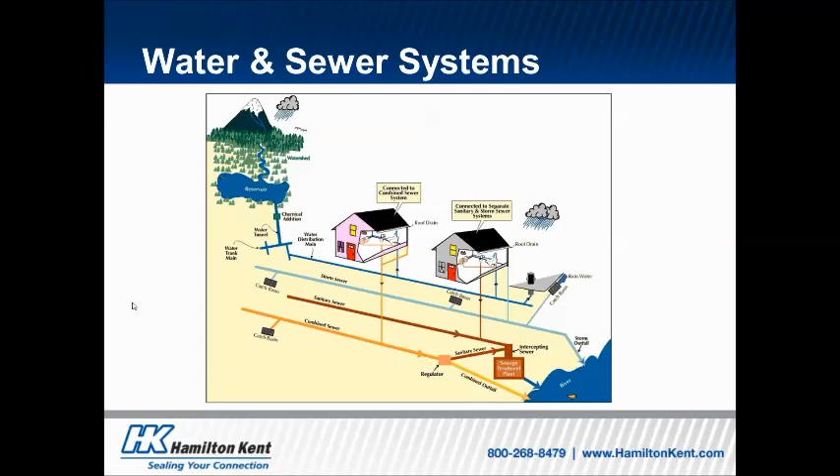This might be a little small on your screen, so I apologize for that, but it's a quick schematic that shows the different varieties of sewers and water distribution. I'm not going to talk about all of this, but I thought this is a nice way to start, to show where it all starts with the water coming in on the distribution lines. You have water mains coming into the houses, you also have rainwater that comes out of storm systems, and where all that water then goes, whether it's into a storm sewer, a sanitary sewer, or a combined sewer. This is just a schematic to show how it all wraps together.

So why gasketed joints? I think that's really the big question. The first bullet point, I think, is very important: increasing specification by government agencies. We're certainly seeing more cities, more counties, more state DOTs requiring gasketed joints because they see the value in making sure they have watertight connections. An example would be Tennessee DOT - they now require gasketed joints on all their pipes and no longer accept butyl sealant.

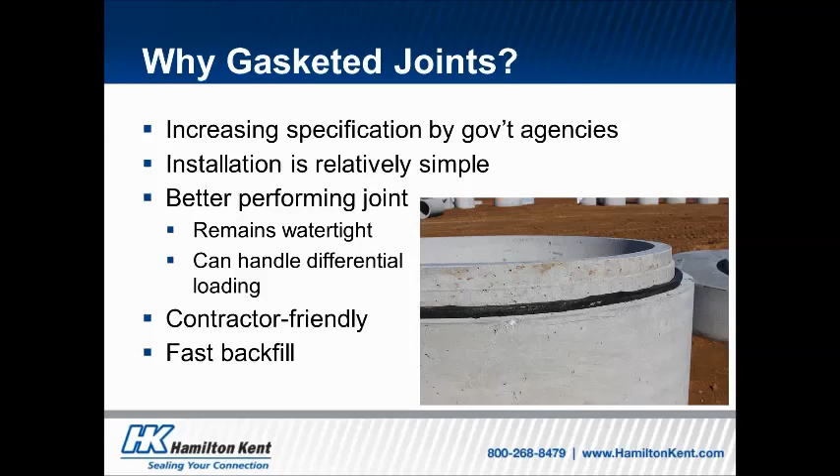So those are a couple reasons why gasketed joints are so good. Now for some joint basics. The manufacturer of the pipe, the box culvert, the manhole, or whatever structure has a joint, must supply a joint and a gasket, or a butyl sealant, that meets the specifications on the job. So if it's ASTM C443 for a stormwater project, they're required to make sure that whatever they send to the job site, whether it's the structure or the gasket, meets those requirements.

The field performance of any joint really comes down to three things. One is the joint design: is it able to handle the requirements of the standards? The quality of the joint manufactured in the plant, is it good enough to meet those standards? Then there's the rubber gaskets: are they the right size, the right type, the right material to meet those requirements? And the third factor is the care with which the gasket and the unit are installed and handled at the job site. Those are three very important considerations when it comes to joints and gaskets.

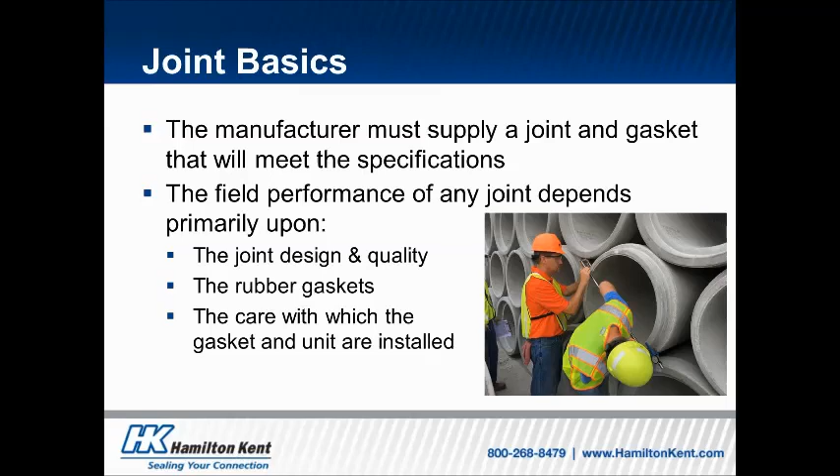There are simple steps that can save the cost of repairs, and there are quality assurance steps that plants and gasket manufacturers can take to prevent something like this from happening. But it can also come down to factors at the job site, as I mentioned before.

Contractors do like a good price, no doubt about that, because this is such a heavily price-driven market that the lowest bidder gets the job. So they're always looking for a good price, but they also want reassurance that when they install the pipe and the gasket, the joint is going to perform properly, because they know that if it doesn't, that's eventually going to cost them in another way. So contractors do have their own reasons for wanting quality on the job site.

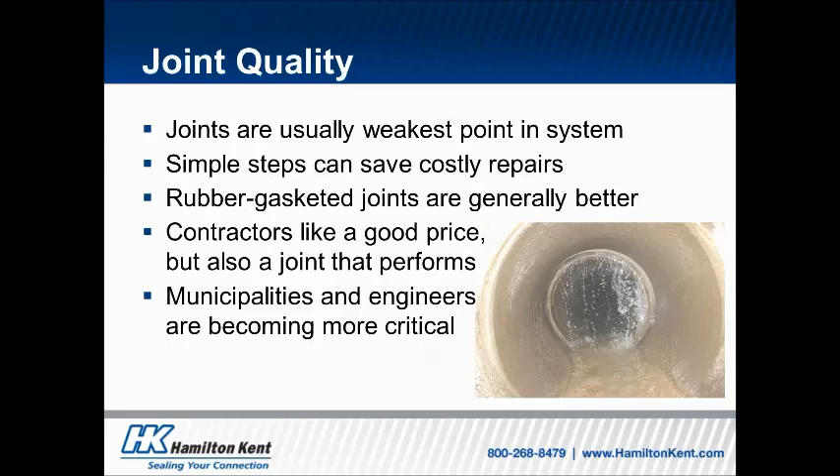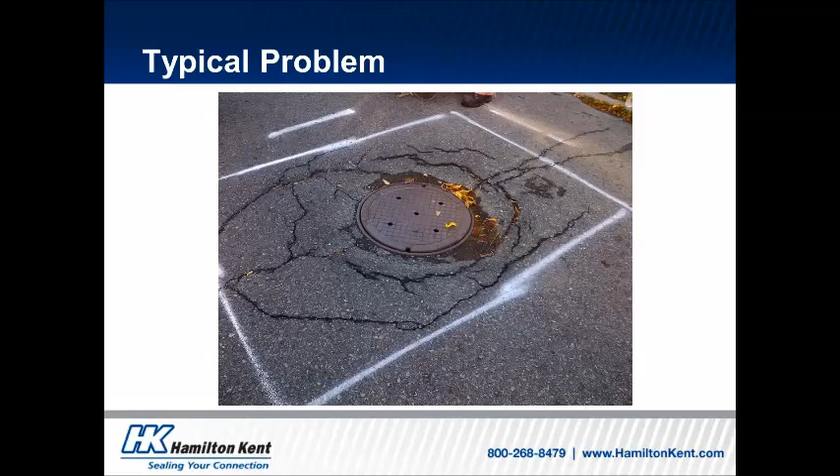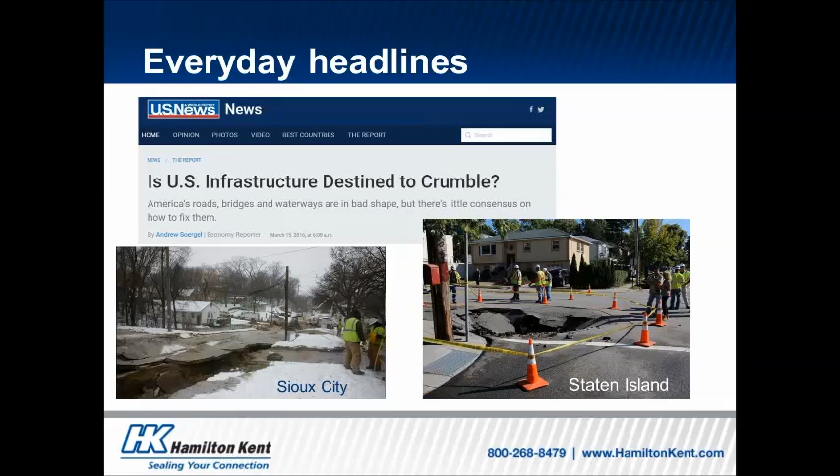Here's some everyday headlines. You've probably seen some of these yourself, and there's certainly a lot more out there. But is U.S. infrastructure destined to crumble? Certainly we're seeing examples of that, but everybody knows infrastructure is important and needs to be rehabilitated. I think steps are being taken in the right direction, but it's still happening all around us. Maybe just the fixes aren't being done at a fast enough pace.

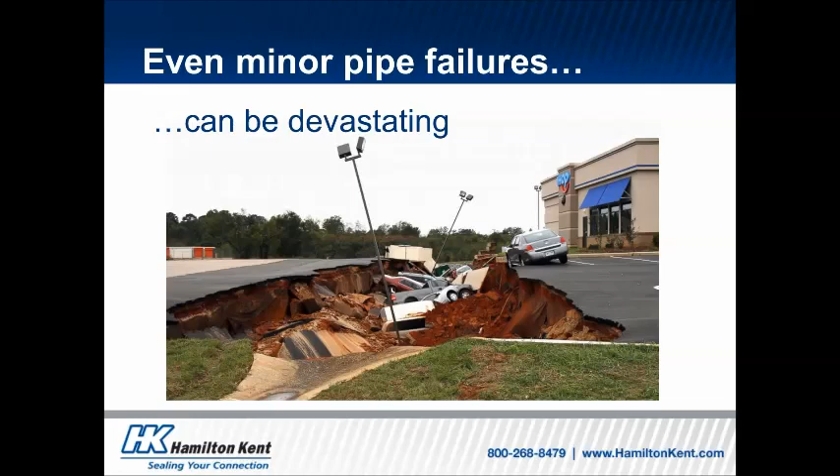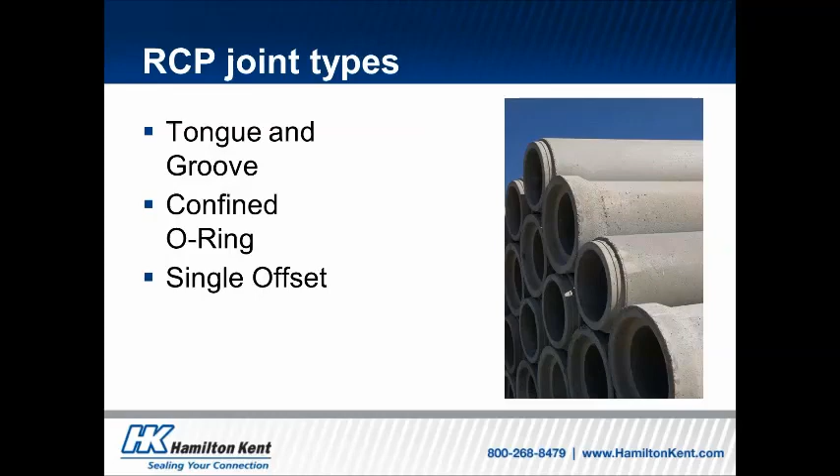So now let's talk about three different types of joints. I say RCP for reinforced concrete pipe, but this also applies to manhole structures as well as box culvert. The first one is tongue and groove, then confined O-ring, and then single offset.

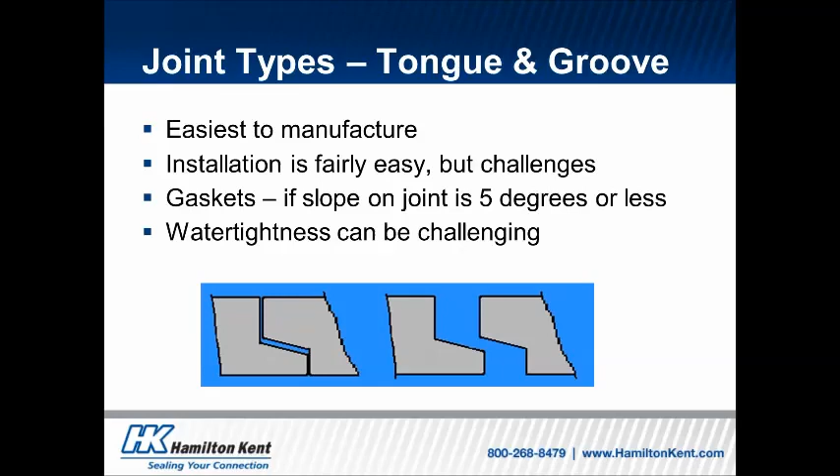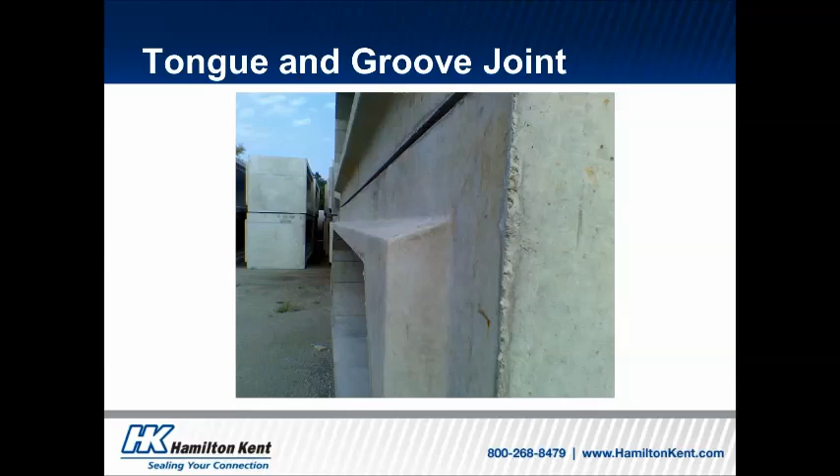Here's an example of a gasketed tongue and groove joint for a box culvert, and it's a very good example - nice straight lines, a very smooth joint. So this would be a very high quality tongue and groove joint.

I talked a minute ago about grouted pipe joints. A lot of times these are just tongue and groove joints, and then rather than using butyl, they just use a mortar and mortar all the joints. Unfortunately, most of the time that we are aware of this or see this is out west, where there's more seismic activity. So you've got two issues: number one, you can't backfill this trench until the mortar's dry. Number two, if there's any type of movement in the ground, any seismic activity, any differential loading, that grout is going to crack. It doesn't take a whole lot for grout to crack, and as soon as that crack is formed, water's going to start leaking in there, and that just creates more issues like what we've already talked about.

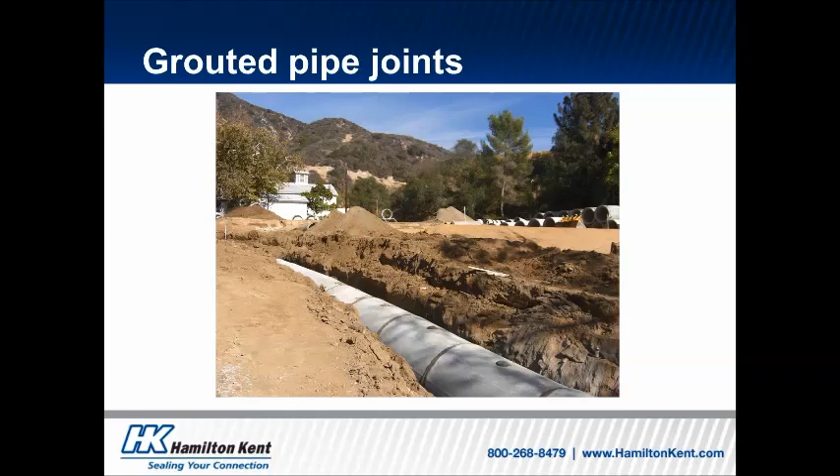The O-ring joint is next, and that's the joint that was developed many years ago just because it had excellent water tightness and very high pressure resistance. You still see that used to some extent, not as much as it was years ago. A lot of companies have switched to the single offset joint now, but you still do see some O-ring joint, especially if it's going to be any type of pressure pipe. The gasket is closely confined - you can see this groove right here where the gasket would sit, so it's confined in that space, and that's what creates the pressure between that space and then the bell coming over it.

It is more challenging to manufacture, which is one reason why a lot of manufacturers have gone away from it. In order to make it, you have to have a snap ring on your formwork, then remove the pipe or manhole from that formwork, and carefully take that snap ring off without chipping the corners of that confined groove. If you chip that, it could mean you lose the water tightness - the gasket could roll out of that joint or just won't seal as well. So it is more challenging to manufacture.

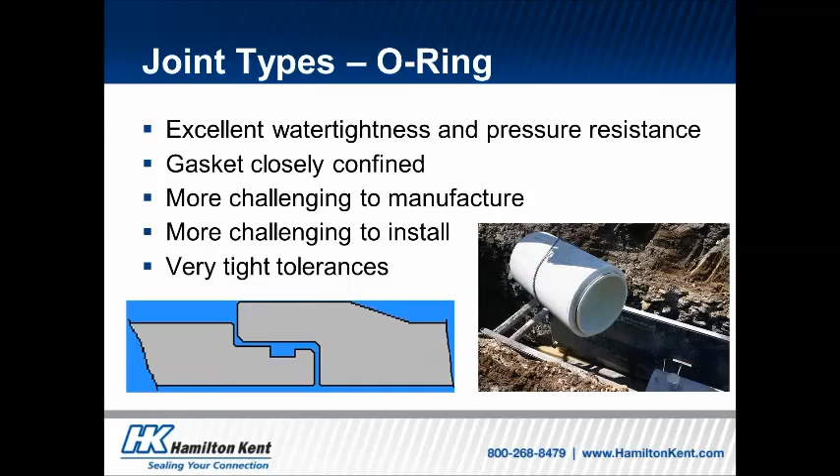Installation is also a factor. There are a few steps involved with putting a gasket on and then homing that pipe, so it is more challenging for the contractor as well. And then there are very tight tolerances - extremely tight tolerances to manufacture this, because in order for the joint and the gasket to work properly, there's not a whole lot of variation you can have in that joint to have it perform well.

And then, as I just mentioned, the single offset joints - manufacturing is easier, but that's because even though you don't have that snap ring to deal with to make that confined O-ring, there are still tight tolerances in order to perform well with a gasket. Installation is simplified, simply because there's not nearly as much labor involved with installation of the gasket, and it usually goes together a little bit better, a little bit easier when homing the pipe or homing the manholes.

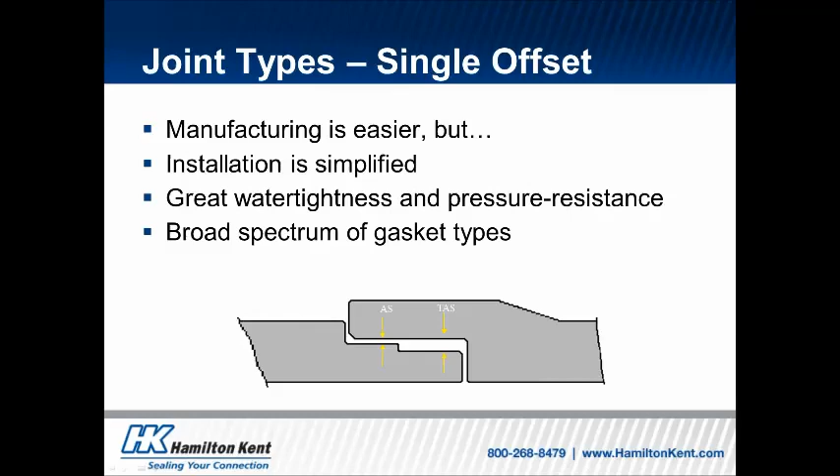Very good water tightness and pressure resistance - it may not be as high as an O-ring can go, but certainly single offset joint will meet C443 requirements of 13 psi. There are a broad spectrum of gasket types which will work with single offset joint, which is another benefit, so there's lots of opportunities and choices for producers as well as for contractors.

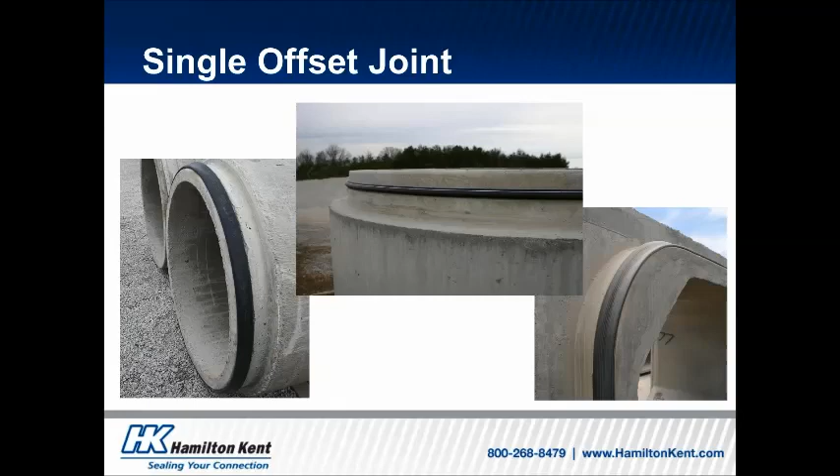So here are some single offset joints on a variety of different structures. You have round pipe on the left with a super seal pre-lubed gasket on it. In the middle you have a manhole with a wedge-shaped gasket on it. And on the right you have, again, a super seal gasket, this time on a gasketed box culvert. So all those with single offset joints.

You also can use a gasket on non-round pipe. These again have single offset joint - the first one you have arch pipe, and on the right you have elliptical pipe. It seems to work very well, especially with a pre-lubed gasket, just because it helps with kind of centering the pipe when you're homing it.

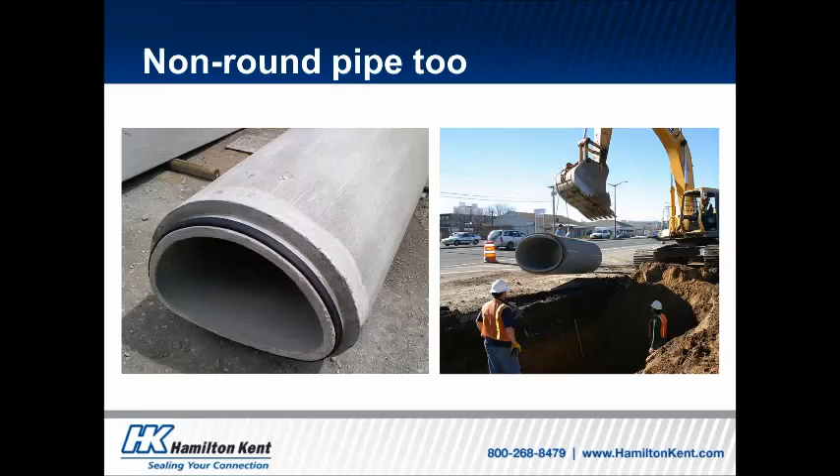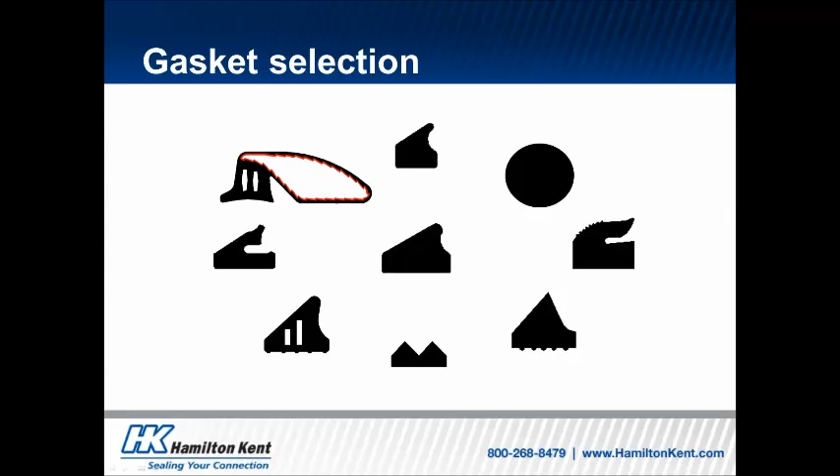You have obviously an O-ring gasket over here. You have a variety of different types of gaskets with a notch in the back - this is supposed to help with areas where there's maybe a higher water table, so more external water pressure. Those pockets help to expand the gasket when there's external pressure. I just wanted to point these out because there are a variety of different types of gaskets available. Obviously, the O-ring is not going to be one of those options for single offset, but that does show the different types of gaskets.

So how do you choose between gaskets? First of all, I think from the producer standpoint, it's what type of tooling do you have? Maybe you already have single offset tooling, and that's going to give you a lot of options. But it could be that all you have is a confined O-ring joint, and then your options are going to be limited either to continuing to go with an O-ring gasket or to going with new tooling to create a single offset joint.

So that's going to be the first step. From a contractor and engineer standpoint, a lot of times it's going to be what is offered by your local producers. If there's pipe producers in your market making single offset joint pipe or manholes, there's a lot of different options, but there are some areas that still require O-ring gaskets, so it's going to be a confined O-ring groove.

What does the market expect and is willing to try? Contractors in general are pretty set in their ways. A lot of times they know what they want - they want butyl sealant, or a pre-lubed gasket, or something else. But in some markets, contractors are willing to try something new. That's what happened with Super Seal 25 years ago when it was first introduced into certain markets. Contractors found they really liked it, and they ran with it. So it really just depends on what the market is willing and able to do.

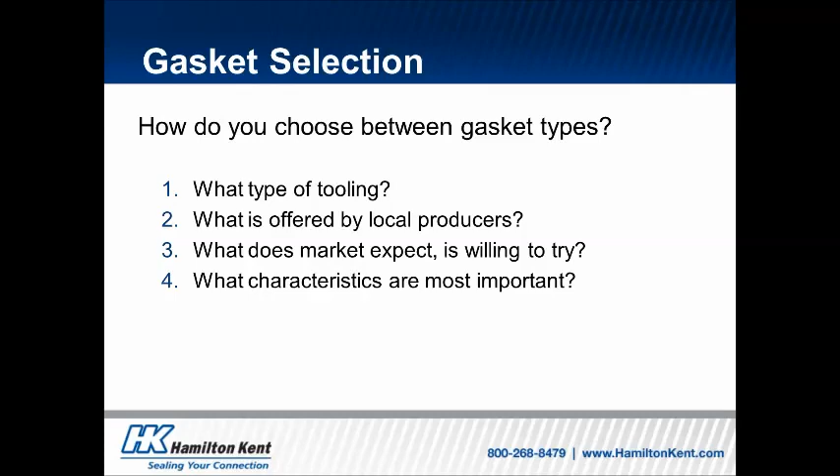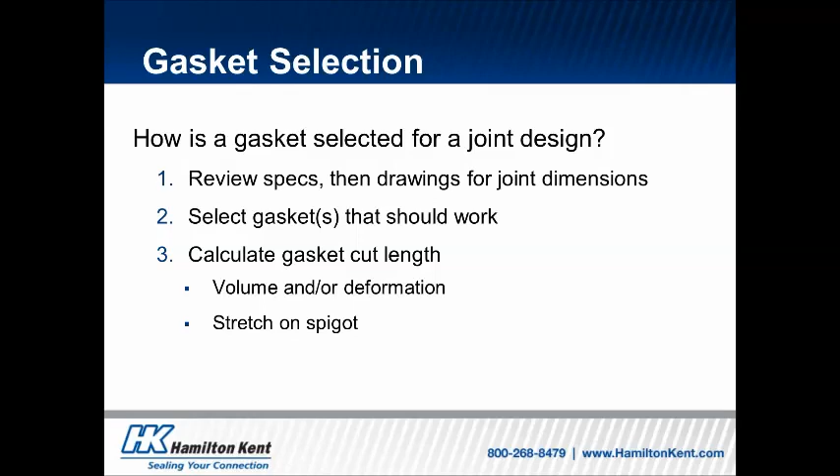So then, gasket selection - how is it selected for a joint design? From our standpoint, we go through these steps. I don't want to spend a lot of time on this, but we're looking at the joint, selecting a gasket or multiple gaskets that'll work. We come up with which profile and then what volume will work with that gasket or joint, and then calculate the stretch on it, and get that out to our customer. Fairly simple process - I make it sound maybe more simple than it really is, but it really is relatively simple from our standpoint.

Gasket material - there are a variety of different materials out there. We primarily use maybe 3 or 4 of them. First question is going to be, is there a specified material? As I mentioned before, if there could be contaminants running through a pipeline or in the ground where the pipe's going to be running, you may need something special there - whether it's alkaline or acid resistance, that would be an EPDM gasket. If you need oil resistance, we prefer nitrile gaskets, but neoprene also works. So there's a variety of different types of gaskets available. That's something to check with your salesperson or supplier to make sure they can supply what you need.

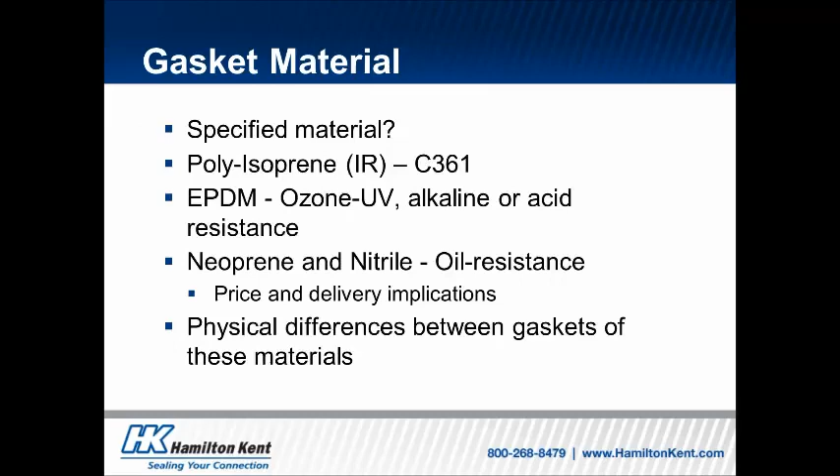ASTM standards - I think this is very important to cover quickly. ASTM C1619 was developed a few years ago, and now ASTM C361 and C443, which are two of the big ones in the pipe industry, as well as C1628, C1677, and others, now refer to 1619 for gaskets. So they'll still have the performance requirements for the pipe or the structure, but when it comes to the gasket, they'll actually refer to one of the classes shown in this table for this ASTM standard. So Class A would be C361, Class C would be C443, and so on.

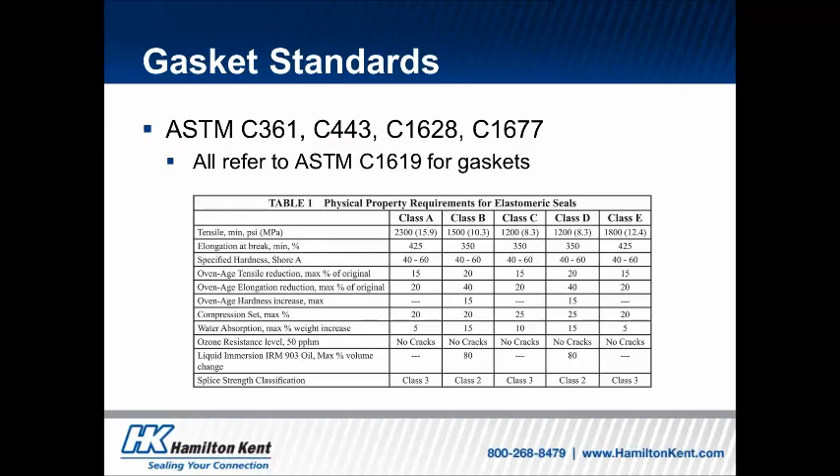I also want to talk for a moment about gasket quality assurance and why it's important. There's really kind of a slim margin between a watertight joint and a problem in the field. If the gasket's too small or the joint is not manufactured within tolerance, you could have a leak - or vice versa, if the gasket's too big and the joint is also out of tolerance, you could bust a bell. We try to find the sweet spot, making sure the gasket works with the joint, but it's certainly a partnership between the producer of the pipe and manhole, as well as the gasket supplier. Making sure the contractor receives the correct gasket is obviously very important. We do our best to make sure our customers receive the right gasket, but nobody is 100% - mistakes can be made.

So it is important for the pipe producer to make sure that the gaskets being shipped out to the job site are correct, and that instructions are being supplied to the contractor on how to install a gasket. If training is needed, they can work with the gasket supplier on training.

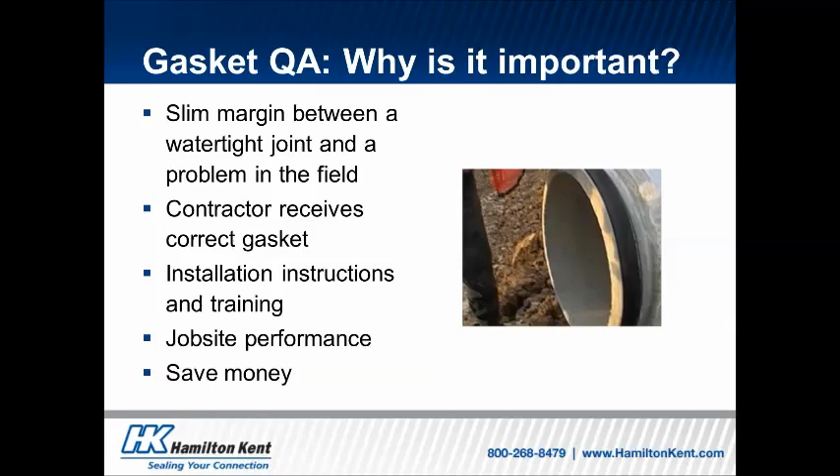And then job site performance comes down to all these factors. So if the joint performs well, then that works great, and everybody saves money because nobody has to go out and repair anything, and the contractor's happy.

I'm not going to talk too much about these, but here are some of the gasket quality assurance tests that are done. We do all this ourselves, but in some cases customers will also do this just to double check, and some certification programs require them to do this anyway. These are just to make sure the gasket meets those requirements.

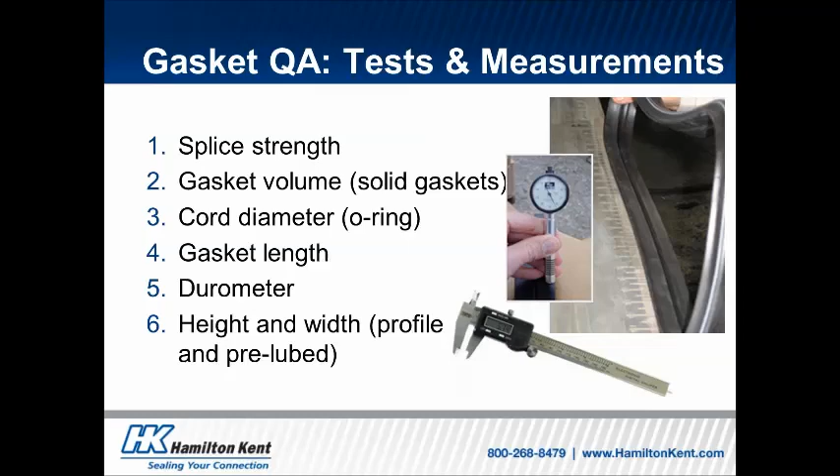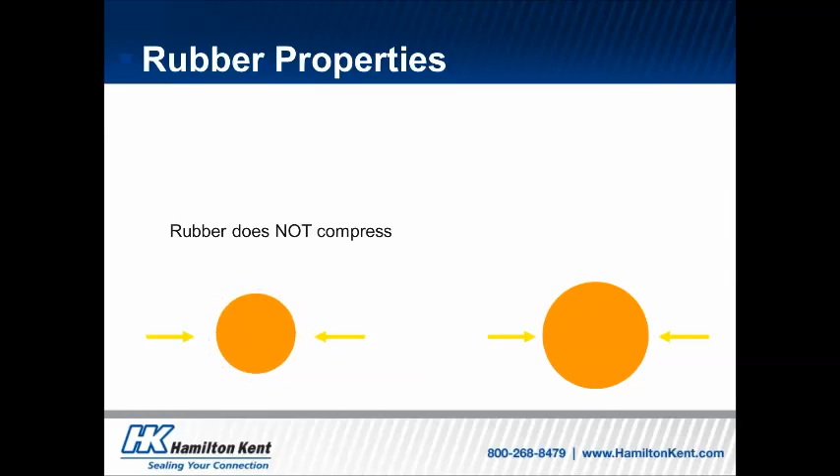So now let's talk a little bit about rubber properties. Like water, rubber does not compress. So you're not going to see what's happening on the left; you're going to see what happens on the right, where it deforms. You're not going to be able to make that circle smaller, it's only going to make it lopsided.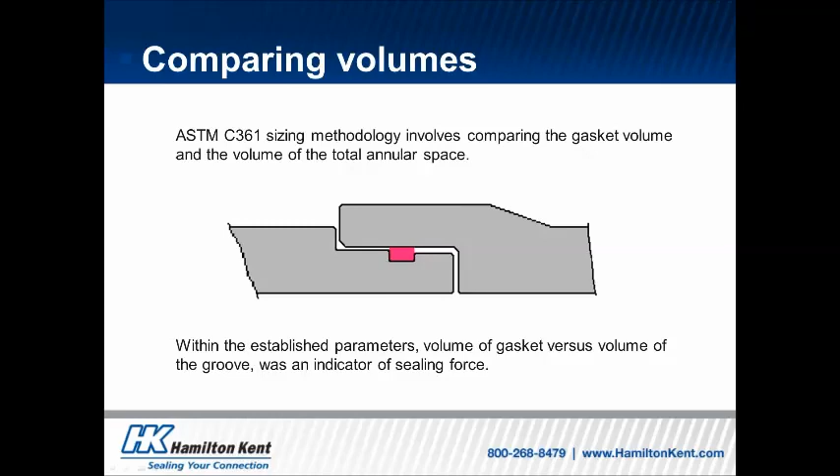So ASTM C361, the sizing methodology, when it was first developed, was comparing the gasket volume and the volume of the total annular space, designated here with this pink square, pink rectangle. So within the established parameters, you look at the total volume of the gasket, which is pretty easy with a round O-ring gasket, versus the volume of the groove, that pink area, and then they could determine what the sealing force is going to be.

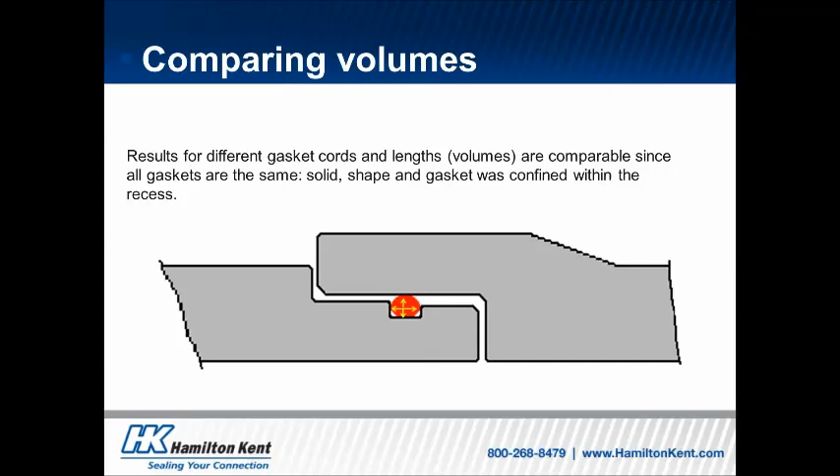So here you've got results for the dimensions of the joint and the dimensions of the O-ring, so it's pretty simple. It's a solid shape, and the gasket is confined within that recess, so it's really a fairly simple way to do it.

Well, when the single offset joint was first coming out, and we were selling our pre-lubed Super Seal gasket, we had some issues to overcome with the end users and the specifiers, because they're used to being able to calculate very easily what the pressure resistance of that joint's going to be by looking at those two things, the O-ring as well as confined space. Whereas with a single offset joint in this gasket, or even with just a regular profile wedge-shaped gasket, there was not really a way to figure that out.

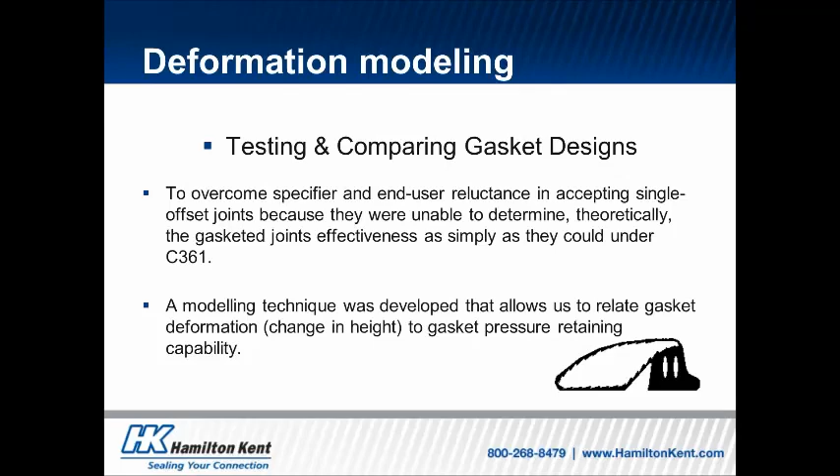So we came up with a method called deformation modeling, in order to calculate what the sealing force of a gasket was in a single offset joint. I want to talk a little bit about that over the next few slides.

Some of it's going to be a little bit on the technical side. We're going to look at some graphs. I'm going to go through it relatively quickly because I don't want to keep you guys all day. But if you have any questions about it, certainly you can ask in the question box, or later on I'll be supplying my email at the end. You can email me, I'm happy to answer those questions.

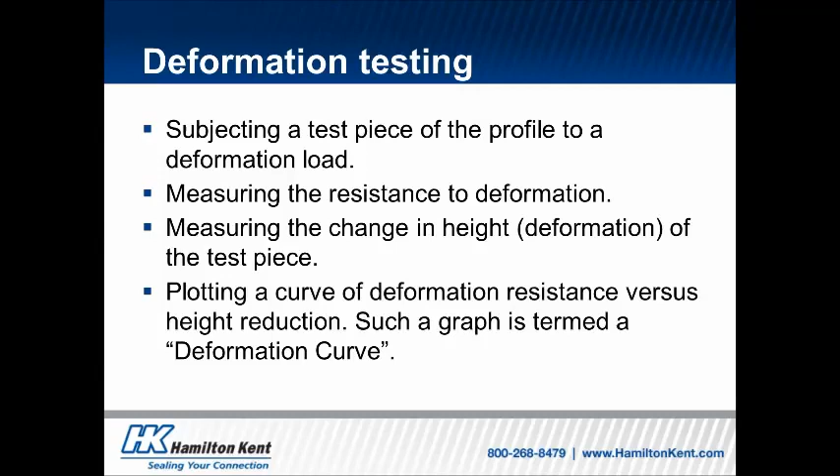So first of all, deformation testing. You're basically subjecting a test piece of gasket to a deformation load, and then measuring the resistance to that deformation. So you come up with a gasket profile, and measure the change in height of the test piece that's being deformed, and then you plot a curve. That's what we're going to be showing here in just a moment, what that curve looks like.

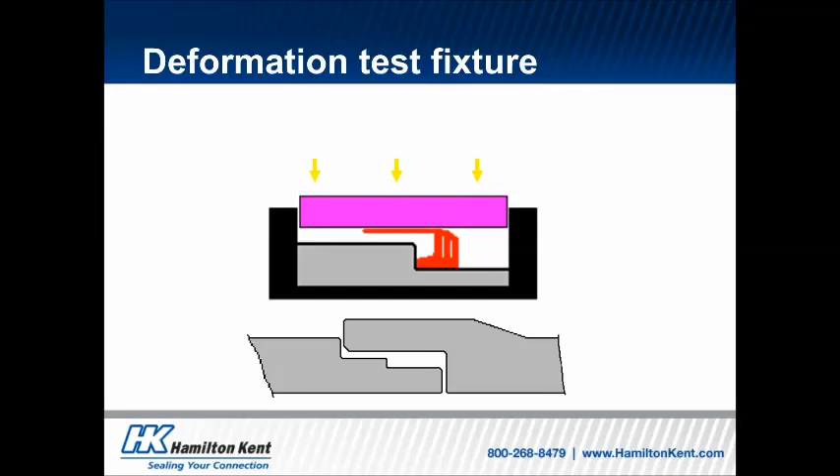But before we get to that, I'm going to show you how it's done. So you can see down the bottom of this is the picture that shows a single offset joint like we've seen already. Well, what we've come up with is a test fixture that looks kind of like what's up at the top. It has walls that are the black part, and then you have a step, which is just like a single offset joint, right here. You put the gasket in here, and then you have a load you apply to that. So that pink part is coming down, that's the load being applied to that gasket.

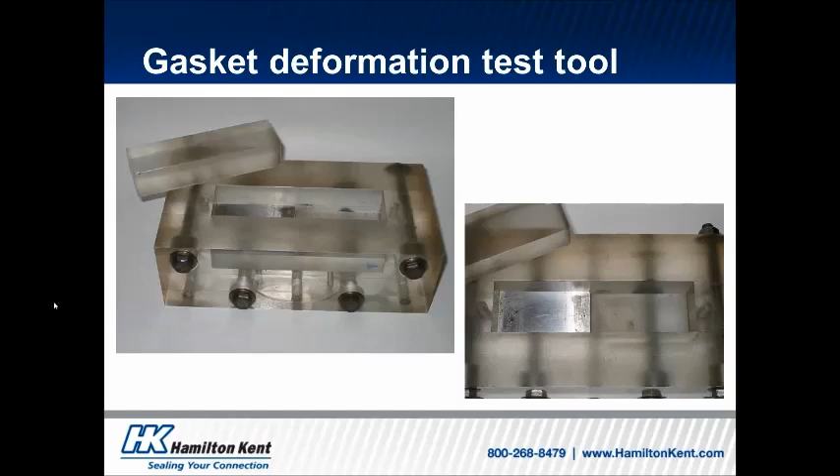Here we can apply a load with this device. You put the whole contraption in, and the gasket inside of it - you can see there's a super seal pre-lubed gasket that's inside this - and you put the block on top, and then you apply a load to it.

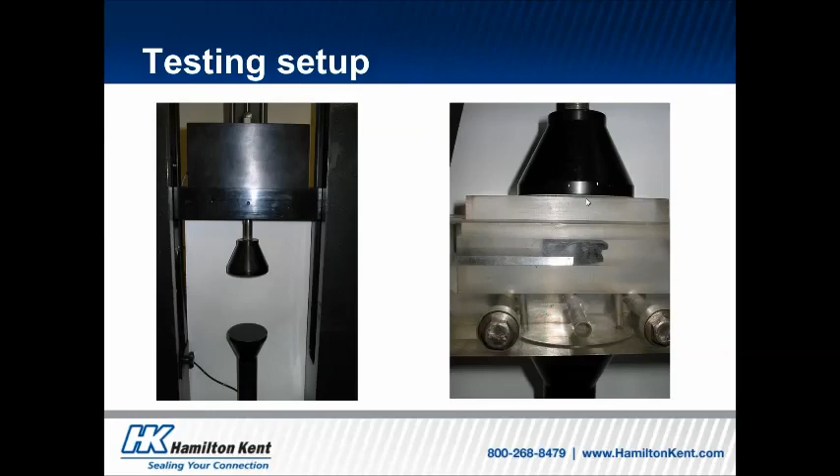Since we're measuring deformation resistance versus deformation, which is the change in height, the starting height of the gasket is very critical. There are three factors that are important in the calculations here, listed below.

The stretch height - when the gasket is actually applied on a joint, it's going to be stretched, maybe 10%, 15%, 20%. So there's going to be some stretch to that gasket, which shortens the height a little bit. The effective height is the height of the gasket when the bell comes over it. And then you have stress relaxation, which we'll talk about in a moment - that's another factor.

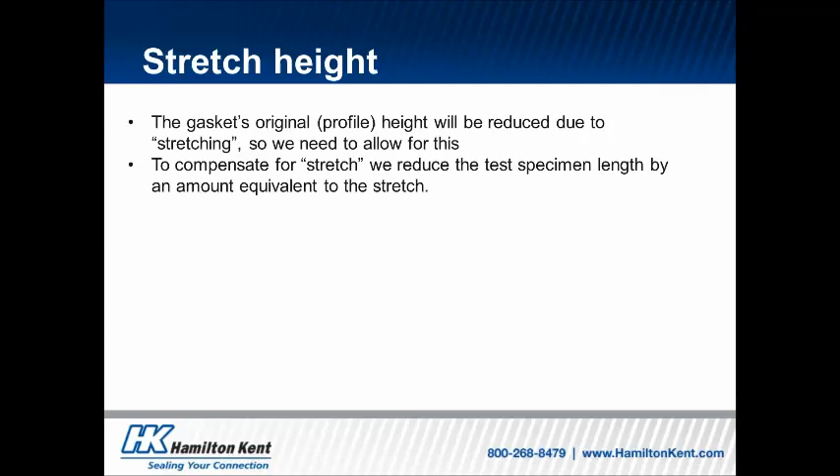Stretch height: the gasket's original profile height will be reduced because of stretching. To compensate for the stretch when doing the calculations, the test tool length from where the step is - the width for the step - is 1.453 inches. If we have a gasket stretch of 20%, that's the designated stretch for a particular joint, the specimen length is then reduced by 20%, so it's calculated times 80%. You end up with 1.16 inches.

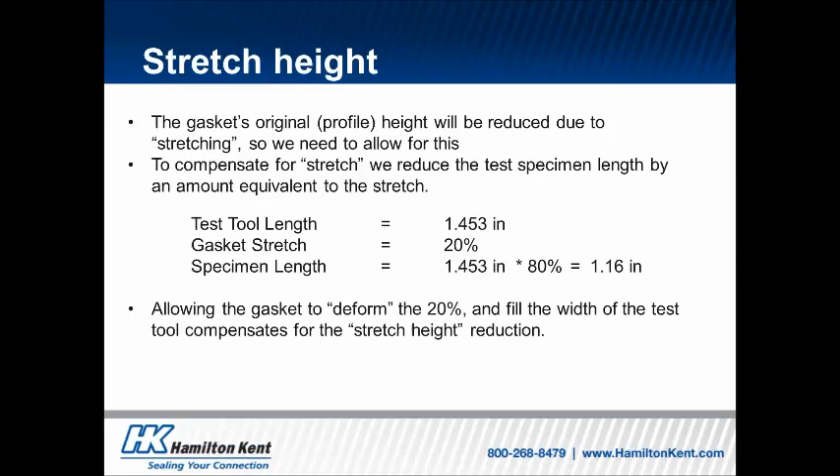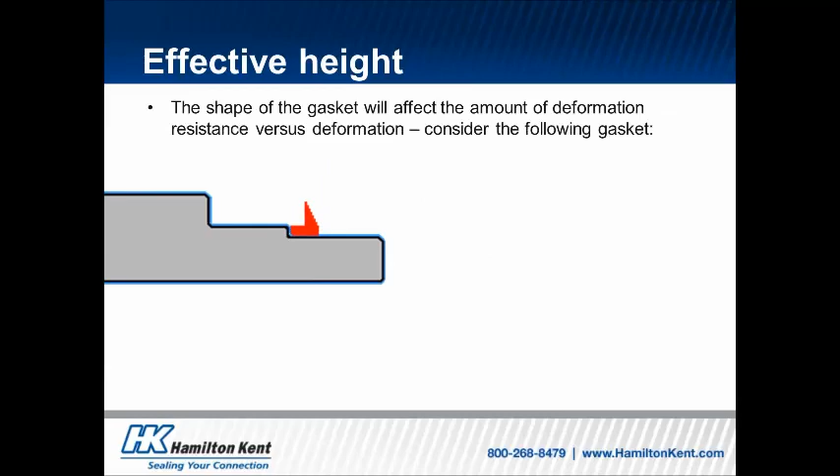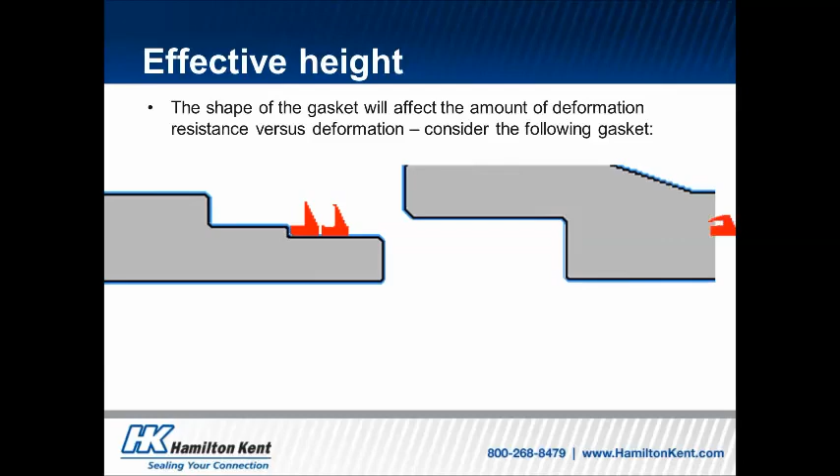That allows for the gasket to deform to the 20%, so it'll start filling the width of that test tool to compensate for that stretch height. Then you have the effective height - the gasket goes onto the joint, which is just the height of the gasket without anything done to it. Then you have the profile with a little bit of stretch to it, and then the bell coming over, which is the effective height. So there's the profile height, the stretch height, and then the effective height.

So now I mentioned stress relaxation. So that's what this is. A rubber will relax if a load is applied to it for a constant amount of time, with deformation, and there's going to be some relaxation to basically the power of the gasket.

This is defined by DIN 4060. The gasket is deformed by 40%, and then the power is measured, just like what we were showing in that graph. Then it's maintained at 40% for 15 minutes, the power is remeasured, and the relaxation factor can be calculated from that.

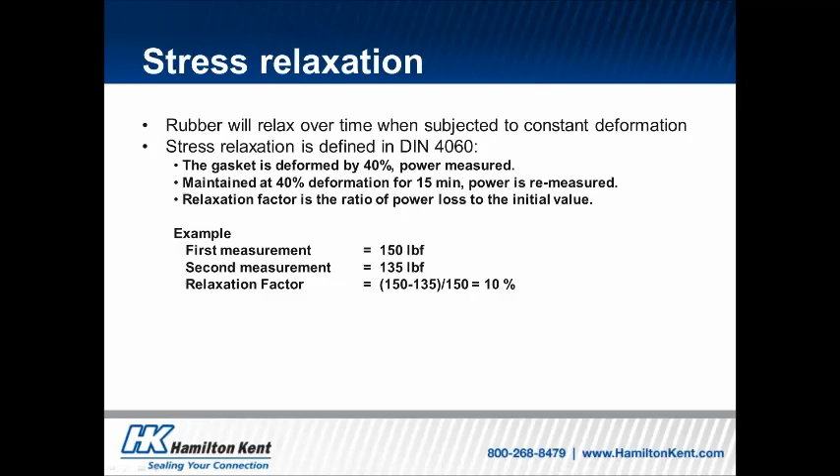So in this example, the first measurement was 150 pounds-force. Then the second measurement, after the 40% deformation for 15 minutes, was 135. So the relaxation factor is 10%.

Here's a deformation curve that shows how that works. You can see the deformation curve going up and up until a 40% load is applied, or 40% reduction rather, and then it's held for 15 minutes, and that starts to drop back down. So the deformation resistance has dropped from 120 down to 110. In this case, we calculate the relaxation at 8.3%.

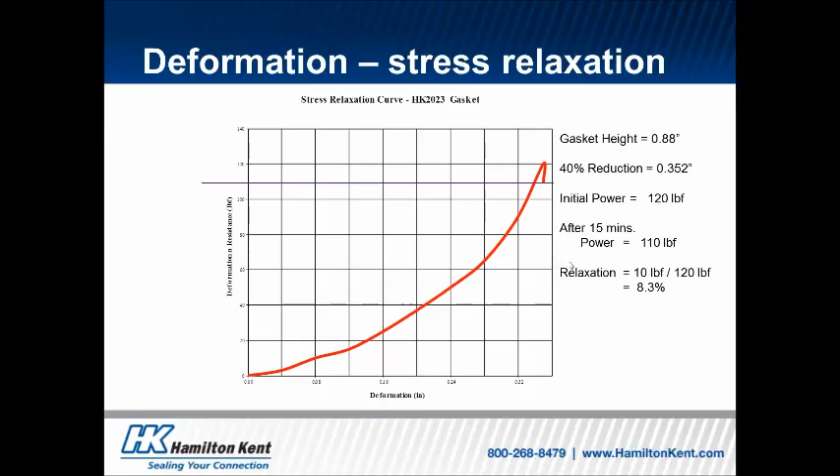So for the rest of my examples, this 8.3% is what we're going to be using.

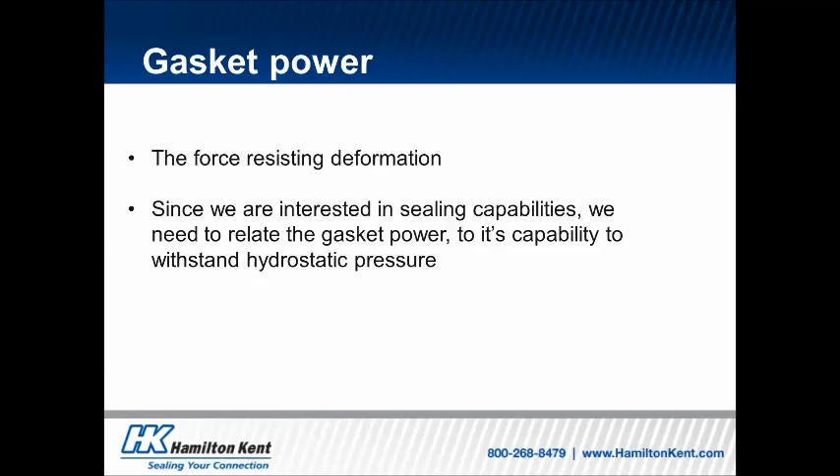Gasket power, as I've mentioned, is basically the force resisting the deformation. As that load is applied to it, that's the resistance to the load. Since we're interested in sealing capability, we need to relate gasket power to hydrostatic water pressure. Since hydrostatic water pressure is in PSI, we're going to convert the gasket power into PSI.

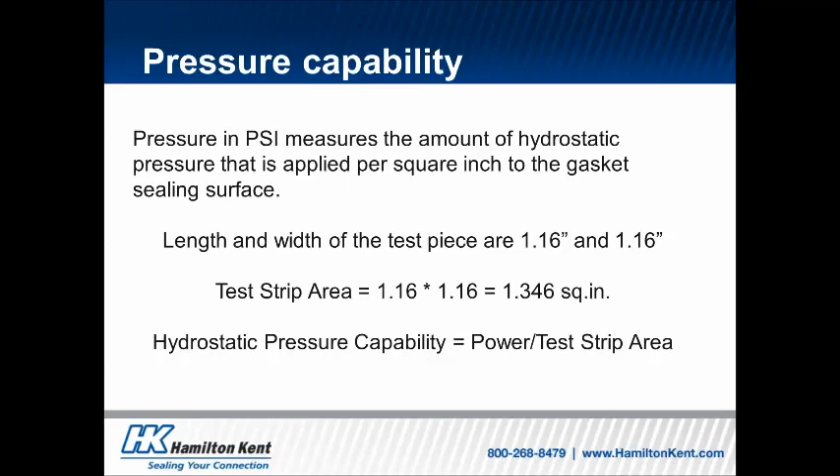So if we have a length and width of a test piece of 1.16 by 1.16, the test strip area is 1.346. Then to get the hydrostatic pressure capability, you take the power divided by the test strip area. That'll give us the PSI capability of that gasket.

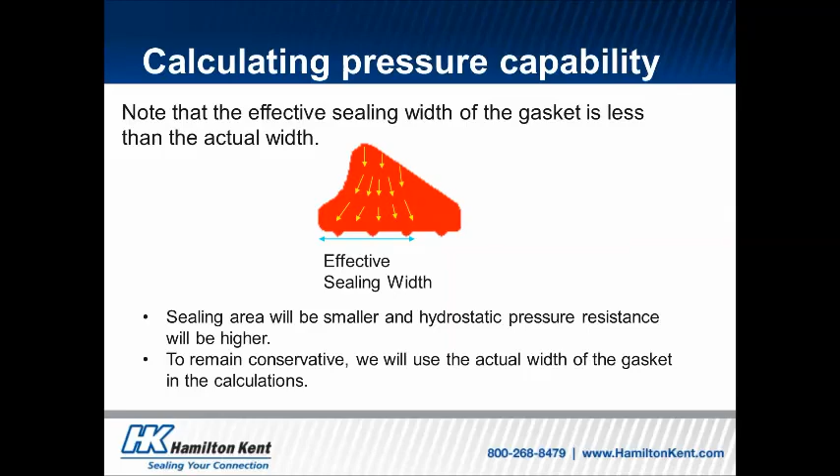But to be cautious, to be on the conservative side, we actually use the full width of the gasket because we're dividing by the area. We're going to be coming up with a smaller number, which is more conservative. I'll show that to you here in a moment.

So the gasket height, in this example, is going to be 0.88 inches. We're doing a 40% reduction, which is for the stress relaxation I mentioned, so going down 40% to 0.352.

Gasket power was measured at 120 pounds, looking at the graph here. Going out to 0.352, and going across from this curve over to the other side, is about 120 pounds. Then allowing for stress relaxation of 8.3%, that drops the 120 pounds down to 110 pounds. With a test area of 1.346 square inches, that comes out to 81 PSI as the sealing pressure.

Now if we had gone with a smaller test strip area, say 1 by 1, it actually would have made this number bigger—this would have been 110 PSI instead of 81 PSI. So we're actually being more conservative when we use a larger square inches for the sealing area of a gasket.

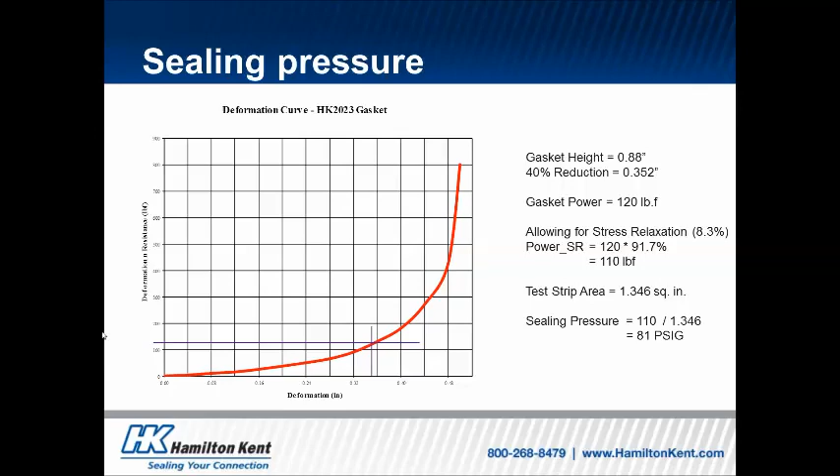So hopefully that makes sense to everybody. Again, if you have any questions, I haven't seen any come up yet, but if you have any, let me know.

Using this deformation model is really nice because it gives engineers, like the ones we have at our company, some leeway in how they can develop. They can design a gasket with a variety of configurations and then calculate, through deformation modeling, what the capability is for handling water pressure. So instead of a round, rectangular, or triangle shaped solid piece, they can use something with a notch in it, or something with lamels, voids running through the gasket. It opens up some variety of design capability.

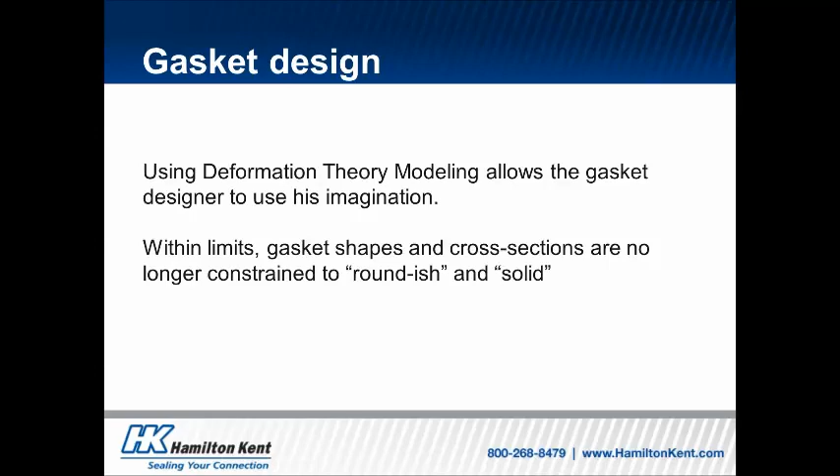There's a variety of considerations that go into figuring out what gasket to use. There's gasket profile height, which has a min, nominal, and max. Same thing with bell diameter and spigot diameter. The stretch height has various factors too. Hamilton typically sticks with a stretch between 17 and 23% for a wedge gasket. C443 allows up to 30%, and C361 is 20% for spigot designs. So there's a lot of different factors when determining the best gasket for a joint.

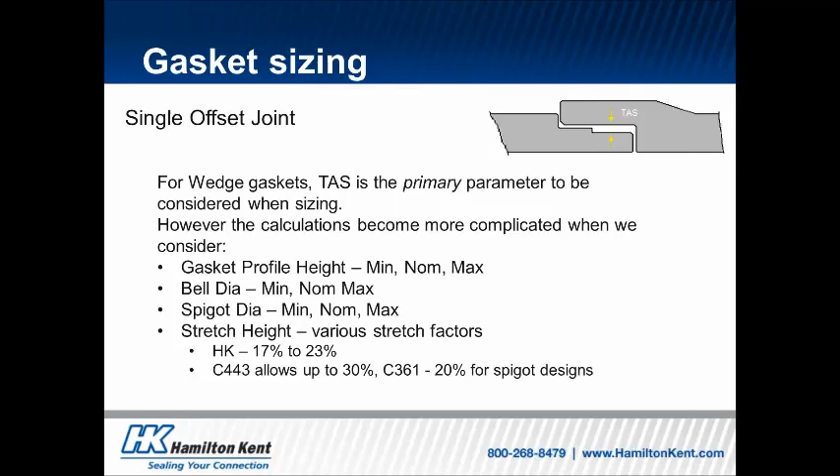What we, and I think our fellow competitors and suppliers, try to do is determine the smallest gasket possible to use with a joint, so that it's the lowest possible cost. That's important for our customers when they're trying to go out and get business.

C443 requires that the maximum total annular space, shown as TAS here in the joint, not be more than 75% of the minimum gasket applied height. I'm sorry, I think I've got that wrong. Anyway, it can't be more than 75% of the minimum gasket height. So if you have a gasket that's 1 inch, the TAS can't be more than 75% of that height.

Applied height includes the height reduction from stretch. As a rule of thumb, we start with about 2 times the nominal total annular space. So as an example, if we had a total annular space of 0.326, a starting point would be a gasket height of about 0.652. That would be 50% of the total annular space, so not more than 50%. I think we're in good shape there.

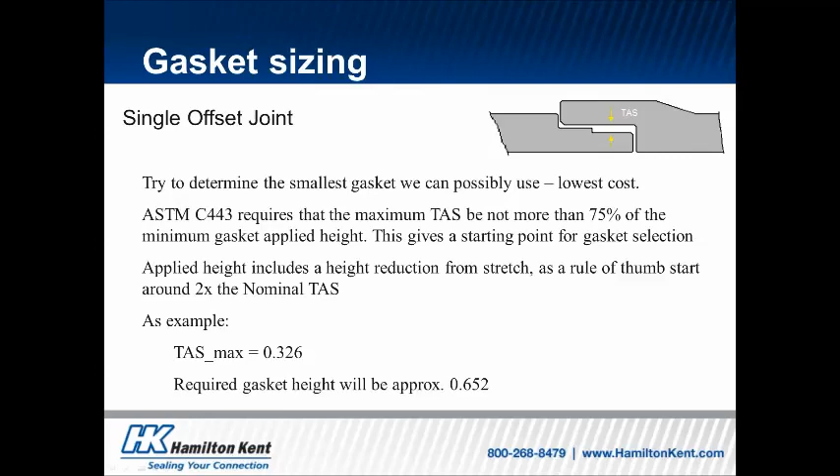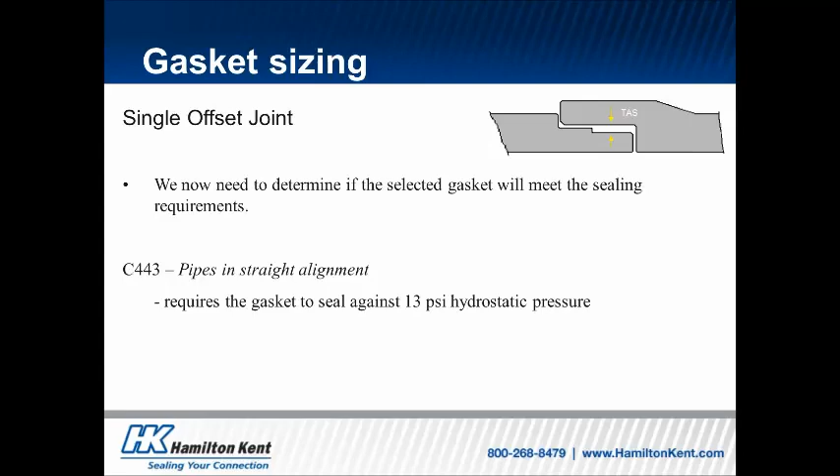Now we need to determine which gasket will meet that sealing requirement. As C443 mentions, pipes in straight alignment require 13 psi of hydrostatic pressure. So for a gasket being considered, you need to calculate the minimum gasket deformation to meet that psi.

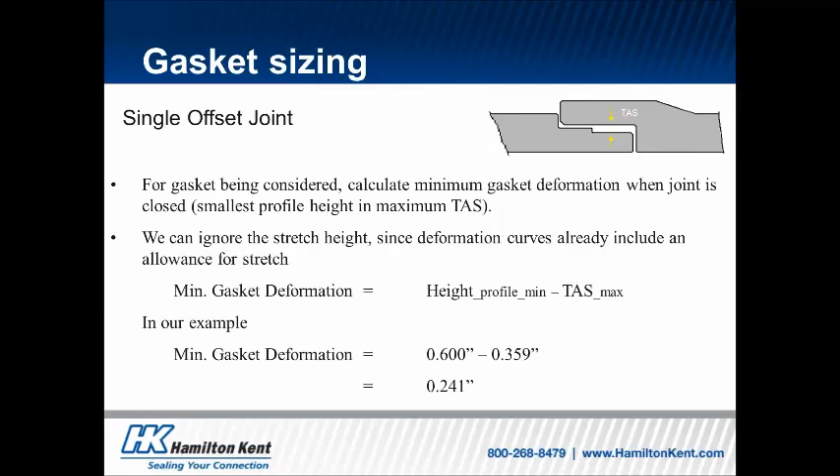We could ignore the stretch height since the deformation curve already includes that. So we have the minimum gasket deformation, which is the height minus the TAS max. In our example, we're going with a gasket that has a height of 0.600 and a total annular space of 0.359. That comes up with 0.241, which is the minimum gasket deformation.

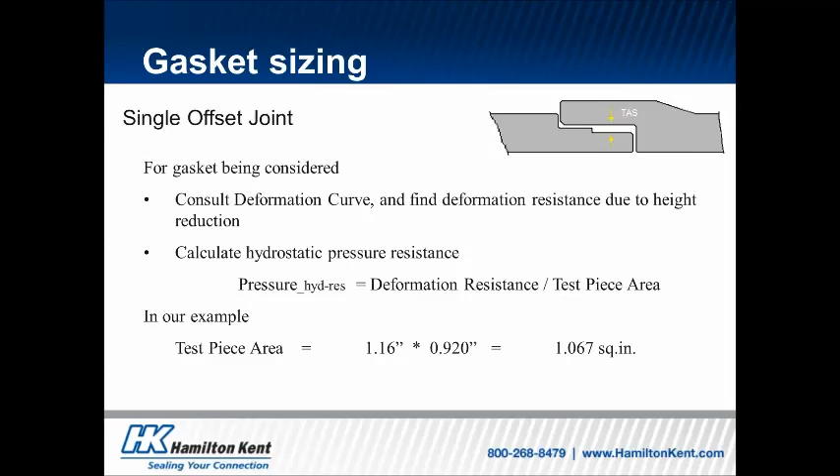So then we're going to consult the deformation curve to find out the deformation resistance at that height. Next, the pressure, which is equal to the pressure resistance, equals the deformation resistance divided by the test piece area, just like we did a moment ago. In this example, we're going with a test piece of 1.16 inches long, which compensates for the stretch when it goes into our measuring device, and a width of 0.92, for a total of 1.067 square inches.

So then you have a gasket area, 1.067, and you divide the power with the stress relaxation on it by square inches, and it gives you 38 psi of sealing capacity, which, with a requirement of 13 psi, gives you a safety factor of 292%. So this gasket in this case would easily, or in theory, should easily meet the 13 psi requirement of C443.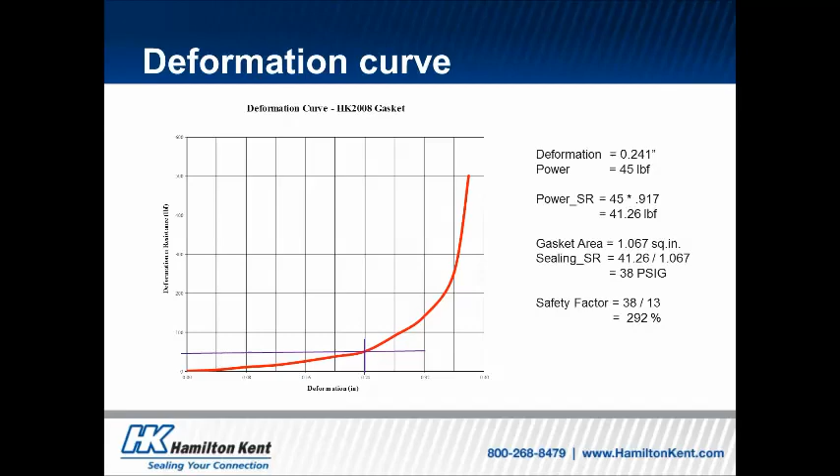Now, obviously, in theory is what we want to meet when we're calculating it, and then we want to have our customers actually do the testing at their plant. So this is just the first step of meeting the requirements.

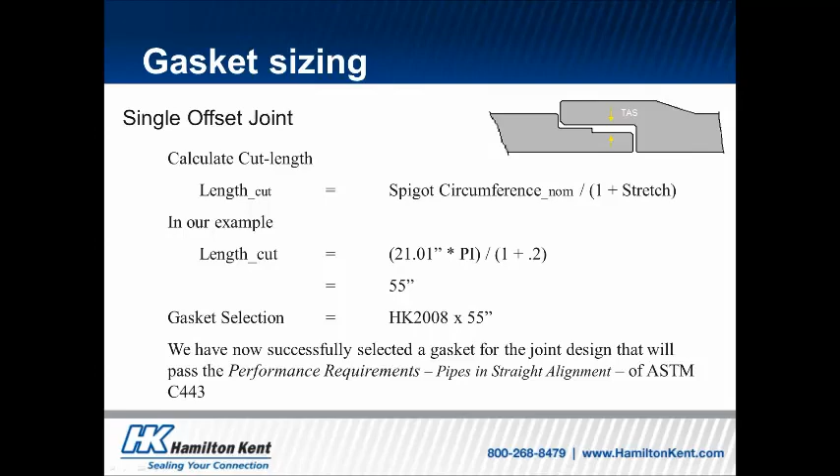Just to add a little more to that, C443 also requires that one side of the joint be opened up a half an inch for deflection testing. So that also then needs to be calculated.

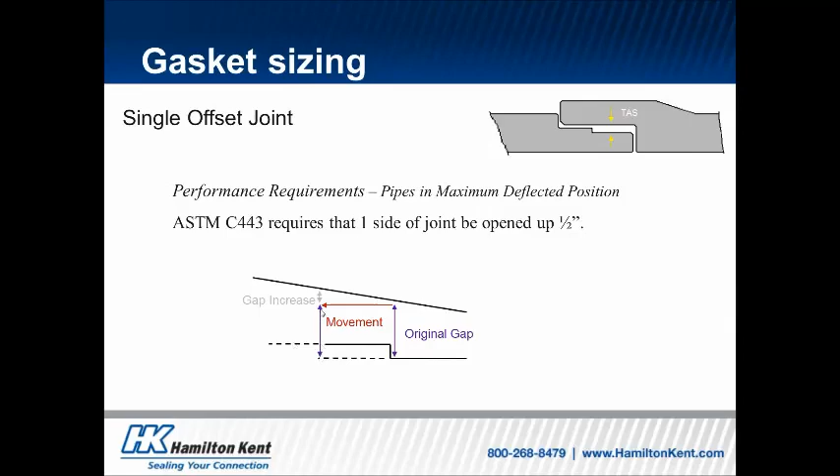Here's an example of that. As the joint is opened slightly on one side, the bell is going to be pulling slightly away from the spigot, so that's shown here. You have the movement, and then you have the increased gap. So originally, if the original gap was here, it's gone out to here. This is the spigot moving away from the bell. So now the step is going to be here, and this is going to be the new height. So the gap increase is going to be there.

So in order to calculate that, it's basically this calculation - I don't need to go through it too much - but the gap increase is a half inch times tangent, or tangent 2 equals half inch times 0.035. So the gap increase here was 0.018 inches. ASTM C443 also requires testing with that deflection of 10 psi, so that's what we're checking for: 0.018 less deformation to resist 10 psi of hydrostatic pressure.

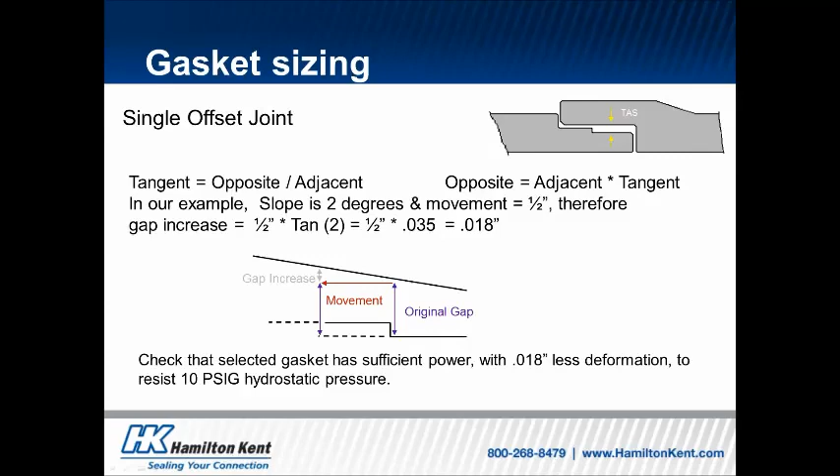So we go back to our curve, and you can see up here on the top we've taken 0.241 minus the 0.018, which is the increased gap, so you get to 0.223. That drops us down on our curve - I apologize that these lines are not 100% accurate - but it's going to drop us down to about 35 pounds. Then you take 35 pounds times 0.917 for the stress relaxation, and that comes up to 32.1 pounds of power.

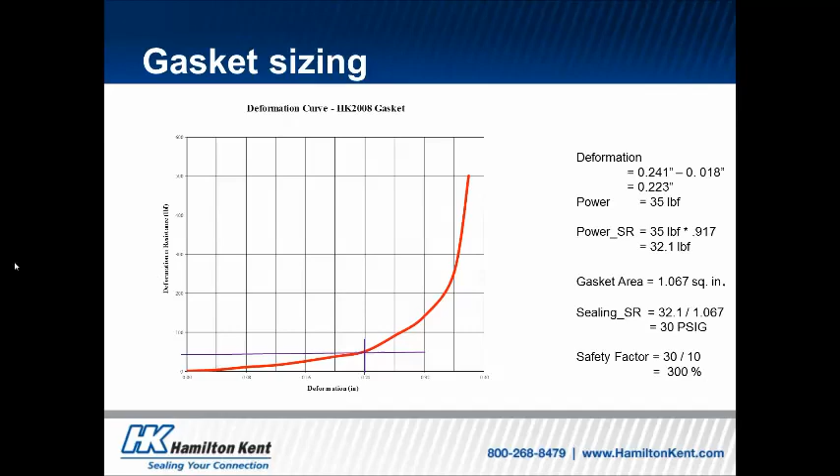Again, the gasket area is the same. Do the calculation to 30 psi, and 30 divided by 10 for the required psi for C443, and that comes up to a 300% safety factor. So again, that gasket should, in theory, work out very, very well for that particular joint.

One thing I've noted here is that ASTM C443 does not consider the maximum deformation - the largest gasket and the smallest total annular space. Too much deformation is going to be a bad thing as much as too little deformation. Too much deformation could result in higher insertion forces because you're basically trying to put a bigger gasket into a smaller area, and that will create much more resistance to that joint being able to close.

We see that sometimes, if there's an issue with the gasket or the joint, contractors try to force a piece of pipe or manhole home. What happens is there's higher resistance and potentially bell breakage. That happens frequently when this occurs.

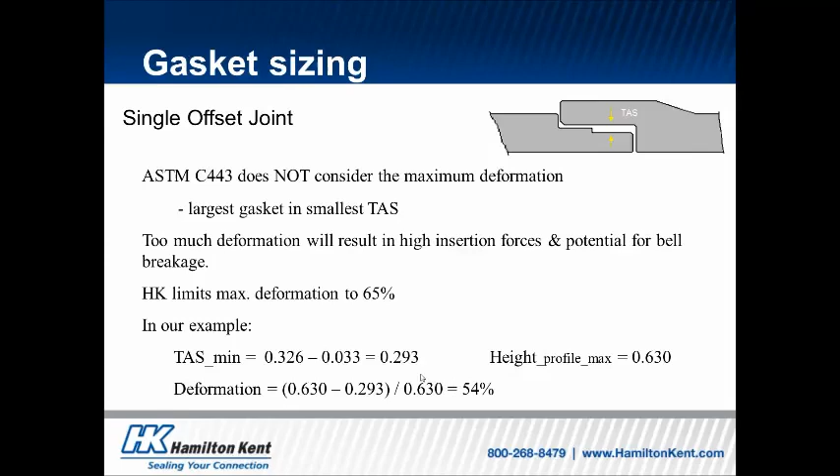So we try to limit our max deformation to 65%. In our example, we had 0.326 minus 0.033 equals 0.293. The maximum, or height of the profile, is 0.63. The deformation is about 54%, which is right where we like to be, a little bit below 65%.

Now let's talk briefly about pre-lubed gaskets. Very similar concept, and the calculations are the same. I'm not going to go through deformation modeling with pre-lubed gaskets because it's very similar.

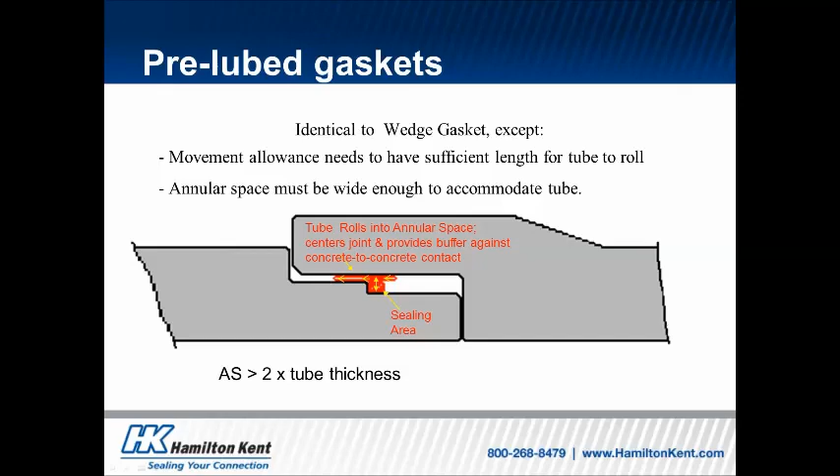Rolling tube will certainly have an impact on differential loading, because as you can see from the picture, that tube, being in the annular space, actually provides a bit of a cushion between the bell and the spigot. So as a load is applied, either to the piece of pipe on the left or the piece on the right, that gasket will help prevent the joint from opening as much as it possibly could with just a regular wedge-shaped gasket.

That's because, as we mentioned before, you can't compress rubber, you can only deform it. So there's only so much deforming you can do before it resists. The bell can only deflect an amount equal to the annular space, which is 2 times the tube thickness.

We have an asterisk there that's important to note: while in theory it would be 2 times the thickness of the rolling tube, it really ends up being about two-thirds of that, so about 1.33 times the tube thickness, because there is some deformation of that tube within the joint.

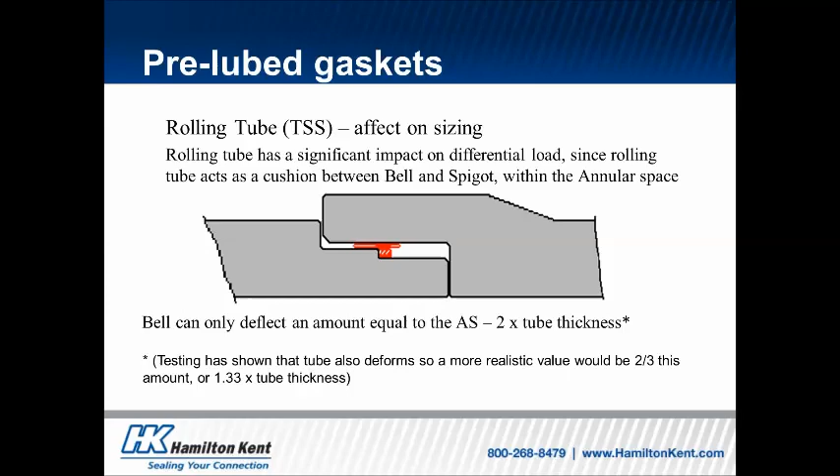The same joint can be used for a wedge-shaped gasket or a pre-lubed gasket. There's really not a lot of limitation there, other than what I mentioned about the annular space — that smaller space, if it prevents a rolling tube from going into it.

But we think the rolling tube provides a lot of benefit. It helps lock the joint together because it has little teeth inside that lock it from kicking back. It also helps with differential loading, since the rolling tube acts as a cushion. In addition, for concrete-to-concrete contact when homing pipe, the rolling tube helps prevent any damage to the concrete during that homing process.

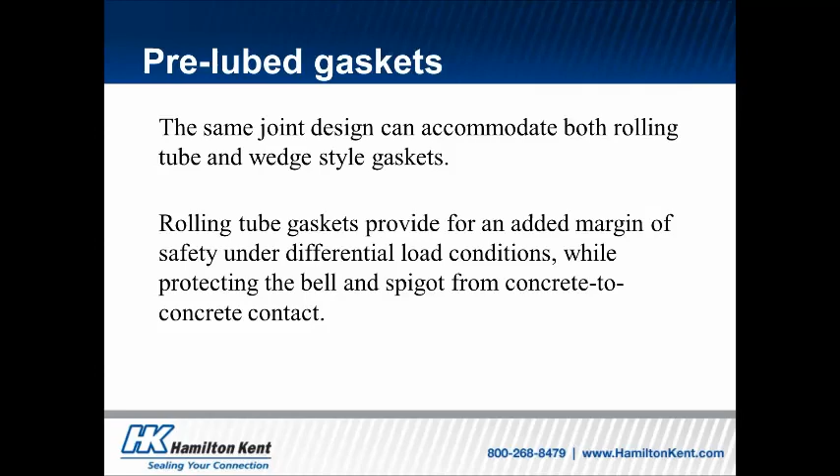Just a few notes here on gaskets for field application.

We certainly recommend that good installation techniques be used, and I think most pipe producers and manhole producers know what good installation techniques are, and most contractors do too. But there are some contractors out there that may not choose to use proper techniques, as far as how to lower the pipe into the trench, how to home it, how to lube it, and are they equalizing gaskets if required? So some of those things maybe they're not doing quite right. I think it's important that if a representative of the producer can't be there to make sure the contractor's doing things right, then at least there's somebody from the engineering firm there to keep an eye occasionally on the installation process.

Cold weather installation: gaskets in general are going to be fairly similar in durometer, which is the hardness, but when exposed to cold weather, rubber will get harder. I think that's probably pretty intuitive - things that get colder, they get harder. So that's something to keep in consideration if you're doing a project in a very cold environment. That gasket is going to be harder to put on the spigot, and the insertion force is going to be harder. One thing that can be done to simplify that is to put it in the cab of a truck or a piece of machinery that has some heat, so you can keep the gaskets warmer. That'll help alleviate some of those issues.

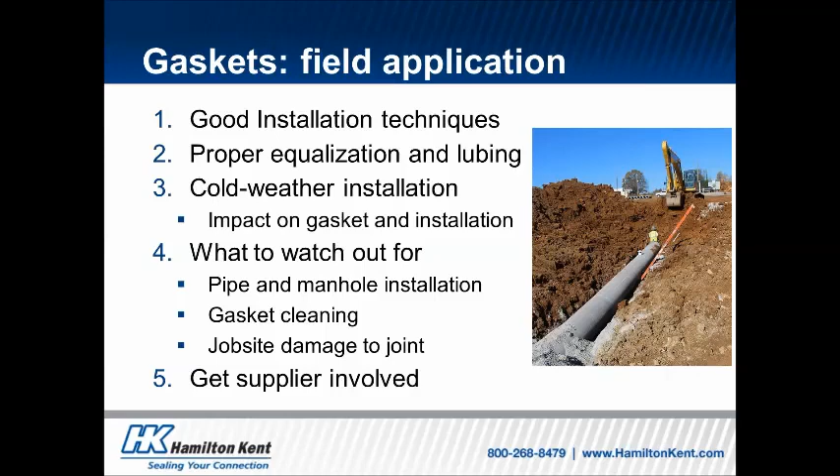And then the final note I have here is just get your supplier involved. If you're a producer of concrete pipe or manholes on the call, certainly get your gasket producer involved if necessary. If you're a contractor, engineer, or municipality on this call, we certainly encourage you to get your supplier of concrete products involved. I think the more you can partner, the better off you're going to be.

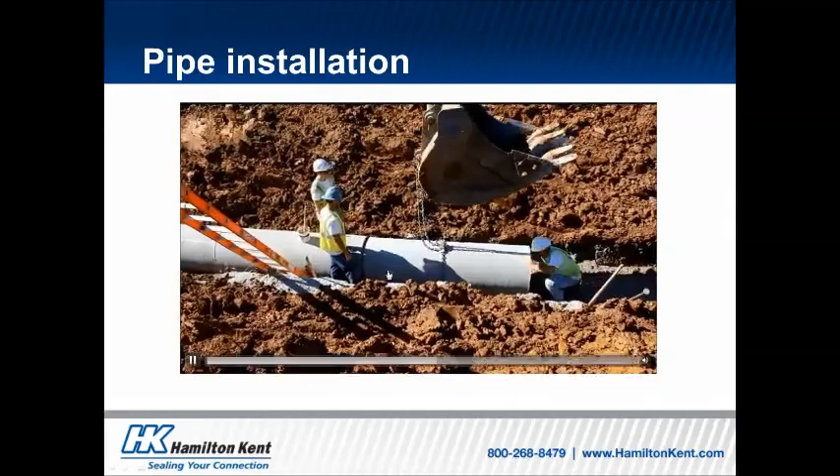I mentioned this a moment ago about pipe installation, and here's what I think is a good installation. You can see the pipe coming in, being lowered into place. That's actually got a little bit too close, but right there you can see it's lowered into place pretty much right by the bell, with a little bit of a gap between the bell and the spigot. Then they use the chain and the track hoe to pull it together, so it comes together nice and level. That's the way to do it.

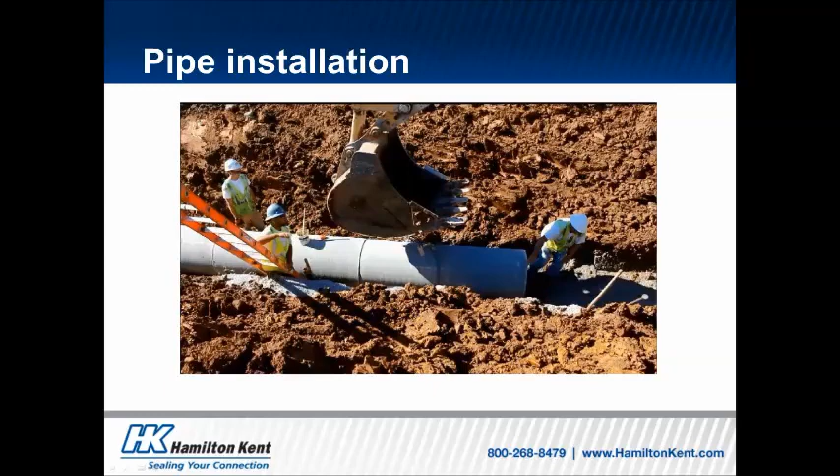Unfortunately, we see too many times where a contractor will bring a pipe in at an angle. They put the spigot inside the bell end, and then drop the bell end of the other pipe down, and the gasket actually gets knocked off. They don't even see that, and they try to home the pipe together, and it either busts the bell or you have a gasket hanging across the pipe, and then you have leakage there. So that's unfortunately something we see too much.

So just to summarize, we certainly recognize there are a lot of challenges going on right now with our infrastructure. We have a big deficit.

The lack of funding currently, and just a lot of failures. We're seeing a lot of pipelines fail, a lot of bridges and roads and much more. So there's big challenges with infrastructure.

With that happening, municipalities and consulting engineers are becoming more cautious about what's being installed on the roads, how it's being installed, how long it's going to last, which I think is a very good thing. So they're taking more of a long-range approach to everything, instead of just what's the cheapest thing we can put in the ground.

There's a broad variety of gaskets for concrete pipe, concrete box culvert, manholes, and other types of structures, available in a variety of different rubber materials to meet the requirements for a job site.

And then deformation modeling, which provides a really good gasket selection process, as well as a good tool for companies like us to design gaskets to fit with a joint. And finally, as we touched on, proper gasket installation and field techniques are very important when it comes to the final use of the pipe and the gasket out there at the job site.